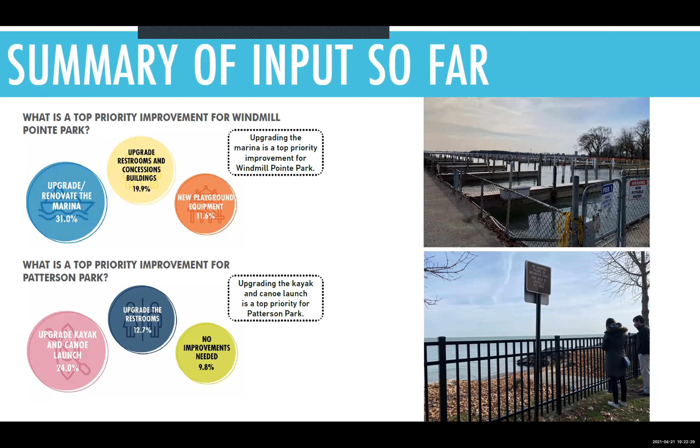So that's just a summary of the input that we've received so far. And like I said, the rest of that will be at the open house meeting.

Just to let you know what we went through with this process - we originally planned to do virtual office hours, but the decision was made to switch to a safe in-person event to help facilitate more quality discussions and give opportunities for feedback. So we had planned that for next week, April 27th, but due to the COVID surge in Michigan, we decided to delay that event. The new date for the open house is Tuesday, May 25th at Windmill Pointe Park.

We have the same times and everything, but that's tentatively scheduled for then. It's going to be at the Tompkins Community Center patio. If the weather isn't great, we'll shift inside to that same building. I've included the website here too, so you can see updates on that date, and the city will also send out notification.

The goal for this event is to basically have stations set up, and we'll have facilitators at each station to talk about and help facilitate discussion for those priority topics, and people can continue to give feedback and ask questions. We'll be sure to practice social distancing and require masks at the event to help keep it safe.

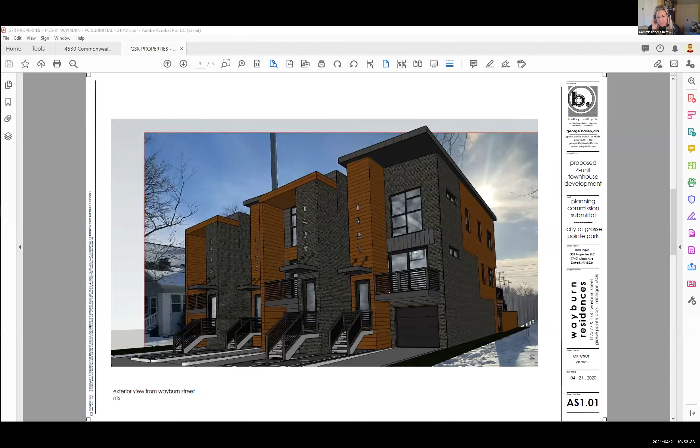So I think I have several more questions - I have a couple more regarding parking, and then I'll yield to the rest of the commission. So you mentioned there's one space outside and one inside in terms of achieving the 2 parking spaces per 2-family unit requirement, is that correct? Correct, yes, there's one space inside the garage, and then the surface parking outside.

Okay, so I'm concerned about the wall of garages that faces the street. I understand that the public alley on your site plan has been completely vacated and yielded to the remaining residents on the other side, so I'm not sure that's even an alley anymore - we could get some clarification on that. But since that happened decades ago, I don't think we have anyone here to answer for that. So I do understand the challenges of providing this dense development coupled with the ability to create walkability on the street.

However, as you mentioned, we have very little provisions, and our code is somewhat thin, but we're getting there in terms of requirements. I am very concerned about the wall of garages that faces the street. We have virtually no pedestrian environment in terms of a sidewalk, and when we look at things like these renderings, the isometrics in lieu of the elevations, what we'll ultimately see are all the cars in the front.

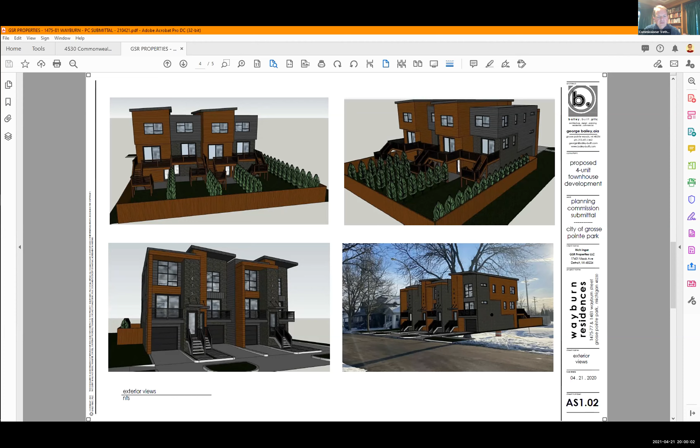Also, with regard to the front, I guess I share the concerns about the lack of green space or the lack of yard. Really, the front yard is entirely taken up by the driveways and some other materials impervious to water. And two of the entrance walkways appear, if I'm reading the elevation correctly, to extend into the 15-foot setback in front. So I guess I'd echo Commissioner Chesterton's questions on that.

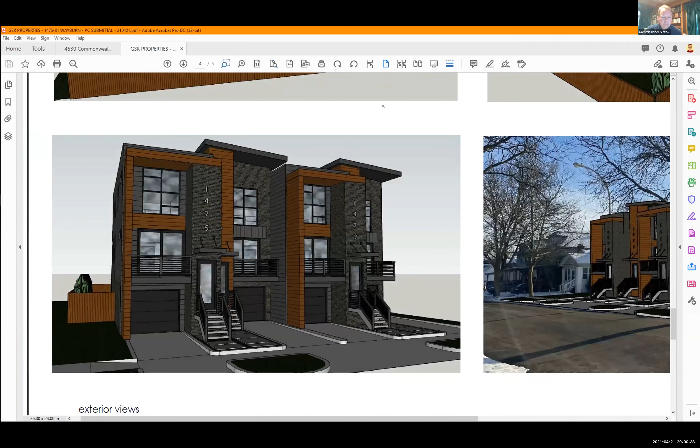With respect to section 2781 and the lot area per unit, I understand it's going to be treated as two unit dwellings. If I'm reading the ordinance correctly, the footnote for a 2-unit building indicates the minimum lot size is 2,500 per unit, which I'd interpret as each building requiring 5,000 square feet. So I guess it's about a 70 by 100 foot lot in total, which is about 3,500 per 2-unit building.

So again, that's a similar sort of question to the front yard question. I'm not sure if a decision was made about that previously. I guess that would be more of a question directed at Ron or Nick.

Well, to address one of the elements, as far as the projection where it's like a porch element with steps to come up, we were informed by the building official that as long as we're not full-blown foundation underneath and outside of that front setback line, we were okay to have that entry piece project over. Now, if that's a wrong interpretation, the ordinance allows for 10 feet.

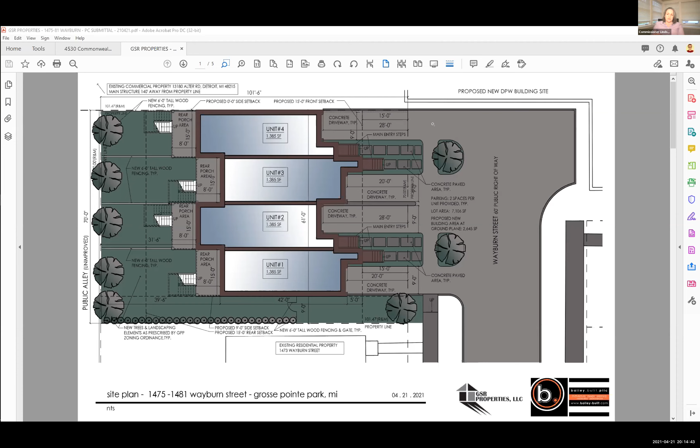Thank you, Commissioner Goodwin. I do have one main concern, and it does go back to the proposed DPW site plan that we approved back in December. The site plan that we have in front of us tonight does not align with the site plan for our new Public Works building, most specifically what Commissioner Chesterton was talking about in terms of that hammerhead turnaround.

I don't see enough clearance for emergency vehicles. I don't see enough clearance for the garbage trucks. I don't see enough clearance for a school bus to get down to the end and turn around.

Again, if we overlapped the DPW site plan with this site plan, they do not align. And we've already approved the DPW site plan that's moving forward. So there would need to be adjustments made to this site plan to conform with the site plan that we've already approved back in December of 2020.

That's my main concern. And again, I would echo what Commissioner Vataki was talking about in terms of height in relation to the surrounding structures, and Commissioner Chesterton had similar questions about the setbacks.

If you take a look, there are walkways protruding in there. It looks like some trees or bits of concrete. It's not really very specific there. So I think that area of the site plan in particular would need some revision.

That's my main area of concern, because I don't know how a garbage truck is going to turn around and back in down there, or if there are children at the end that need to go to school, how can a school bus get in and turn around, or emergency vehicles, whether it be our fire ladder, EMTs, etc. So that's more of a statement than a question, but that's my main concern.

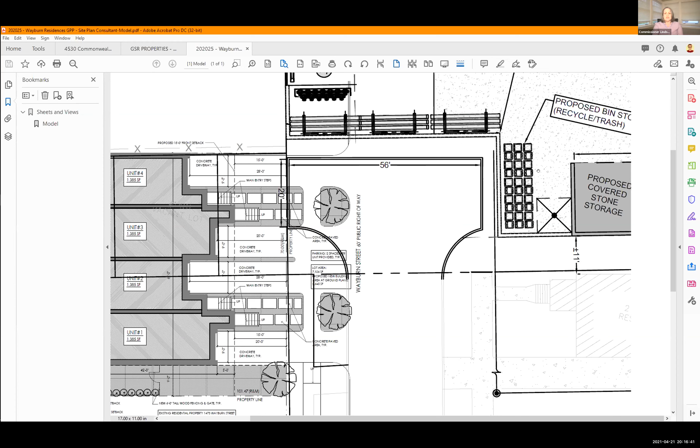Thank you. Commissioner Chairman, Samper? Can I real quick? Yes. I don't know, is my screen still sharing here?

Can y'all see the screen there with a black and white document that has the full hammerhead drawing on it? Yes, we can see that. So the question I would have, and I don't know if this is a city attorney question or what have you.

I understand fully, completely what Commissioner Lindsay was delineating. I know that it was approved, but it clearly, even if we weren't developing anything, the hammerhead would impede on sidewalk access and right of way in front of our lot in general, even if we weren't developing it, which is kind of a hindrance that's not anywhere else on the street. So it would be taking up the entire half of our lot here to accommodate that.

And I understand the need for it, and I 100% agree with it. But just as a question, as far as I guess for myself to make a statement on behalf of our development side, a happy medium somewhere, that's where I did lay in. That's why I mentioned in my presentation, I have been in communication with Stuckey Vitale, the architects for the DPW project, and building official Sioux Paul, to kind of alert them to this, since I noticed this when I started laying out our site plan up against the DPW project.

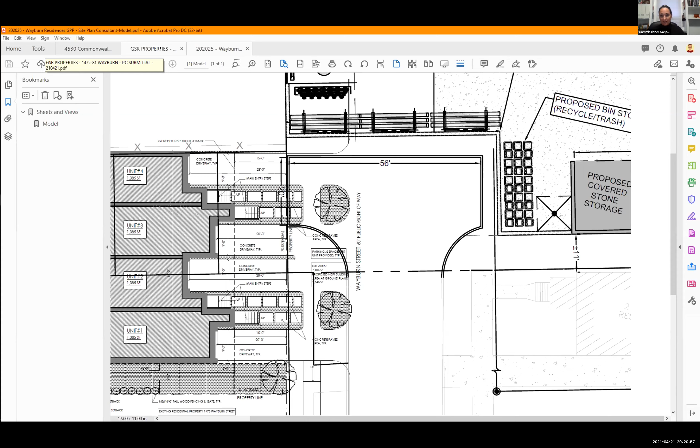Thank you. A number of the things that I have concerns about echo what the other commissioners have said, so I'm not going to go into those again, but I certainly think we want to look at it from an activation standpoint, from how we're fitting in with the rest of the community.

But I also have a concern when we look at this right up next to the DPW development, and for our residents in the area with the amount of construction potentially happening at the same time. We're already talking about a concern of an ambulance turning around there, never mind when we've got multiple construction vehicles working on two projects back to back. I really think that needs to be taken into consideration in our overall timeline, both in the city projects and developments as a whole.

Anything they could pull through right now, if we've already got DPW up in there, they're not going to be able to pull those trucks around. I don't think that's going to be a very pleasant experience for an extended period of time for the residents we have, many long-term residents that we have there on that street and in that area.

The height also is a concern to me. Again, it's already been addressed, but we're greatly dwarfing the buildings in the area. I'm not even sure where the closest building of that height would be to that proposed development, at least on the Grosse Pointe side of the area. So I'd like to make sure we go back and take a look at that as well as we're discussing what our next steps are here. That covers my comments for the evening.

All right, thank you very much. I'd like to move on to Commissioner Coletta. Frankly, everybody did such a great job addressing all the comments and concerns that jumped out to me after the presentation and reviewing all the materials, so I'm going to thank all of you for doing my work for me this time. Thanks, everybody, and I look forward to getting some clarity on all of these questions.

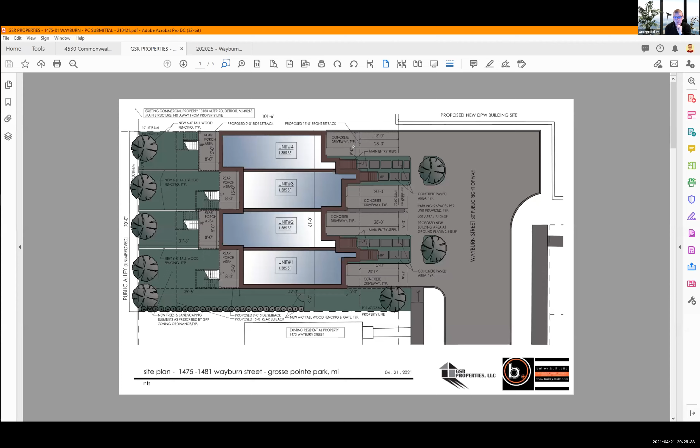Chairman Goodman, this is Mr. Bailey. I don't want to speak out of turn. Is that, can I ask you a question, please? Yes, absolutely.

So as a point of order for our group, I just wanted to clarify, I know right now I heard it multiple times, I'm going to do a detailed height study within the neighborhood in order to gain confidence in our structure against what is currently existing on the block. Any other specific directives that you guys are looking for as a group to address the next time we reconvene?

I believe what I heard was that having some sort of site plan checklist would be helpful to be able to benchmark what's required as part of our zoning ordinance, benchmarked against what you're proposing in a little more detail. That would probably make it a little clearer for us.

I don't mean to speak out of turn, but I think, George, what you can expect is some information from the city based on the minutes of this meeting, plus other concerns that were raised, so that you guys can essentially have the checklist in your hands. That way, when we reconvene and consider it, all the issues are out there on the table. Okay, perfect, thank you.